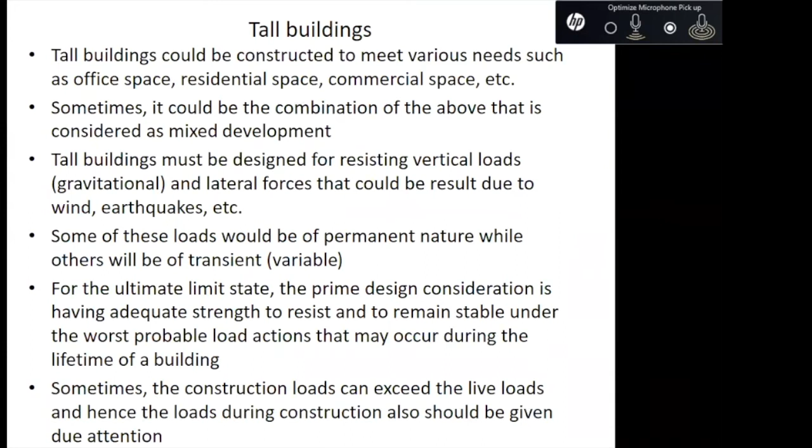So last time I gave an introduction. I told you the various general stuff, like the type of concretes that we'll have to use. And then we also talked about the deflection and drift index, wind-induced movements. We'll be covering these in great detail later.

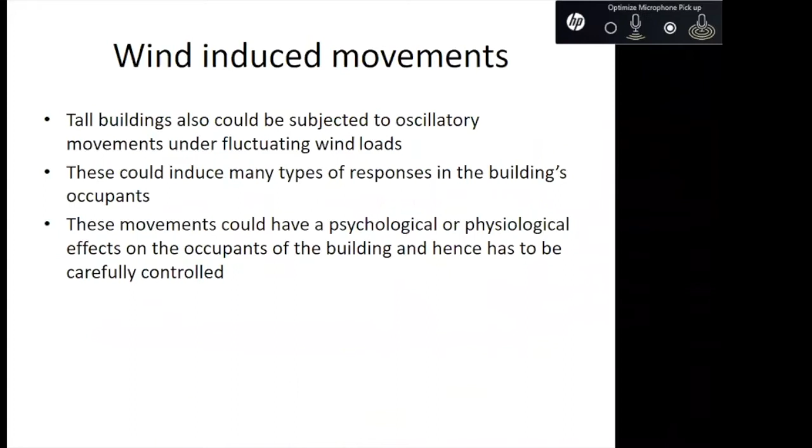But what I wanted to emphasize was, in a tall building, the lateral load resistance system can be very important. In addition to that, we need to have an efficient vertical load resistance system. So once you have both systems, we need a good foundation, a foundation that will not move, because we don't like buildings moving at the foundation level. We like buildings to be stationary.

So basically, we are talking about vertical cantilevers. Generally, when we are talking about cantilevers, we always think about horizontal cantilevers. Something projecting out without a support is a cantilever. So all the tall buildings are vertical cantilevers, where if it is a cantilever, then we must fix it at the foundation level.

So we have to see how we fix it at the foundation level. For that, I have separate presentations on how to deal with raft foundations, how to deal with pile foundations, and even in the raft foundations, whether you want to have a solid raft or a cellular raft or inverted T-type raft.

Where we'll use the inverted T's plus the confined soil, the soil confined by the ground slab to act like a raft. And then we can also have raft foundations on sandy soil or laterite soil. In laterite soil, we might find sometimes the water table is high, sometimes the water table is low. So I'll show you that the modeling techniques can be very different when the water table is high and the water table is low. The reason is, if the water table is low, we have laterite soil, we consider soil behaves like sand. On the other hand, if the laterite soil has a high water table, we consider the soil behaves as a clay soil. So clay soils are very different to sandy soils.

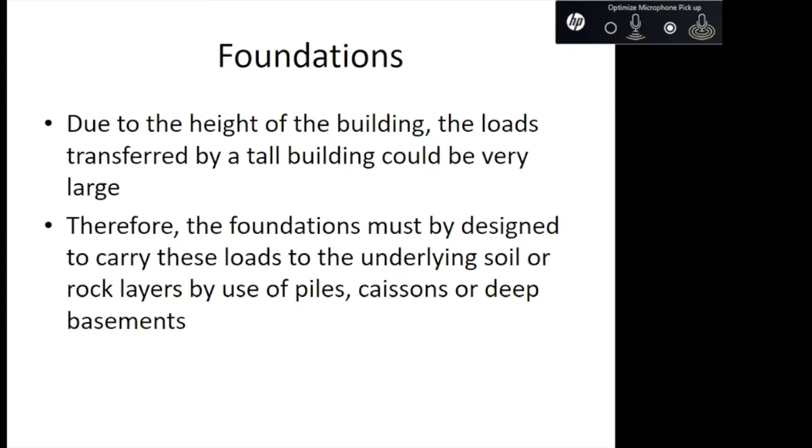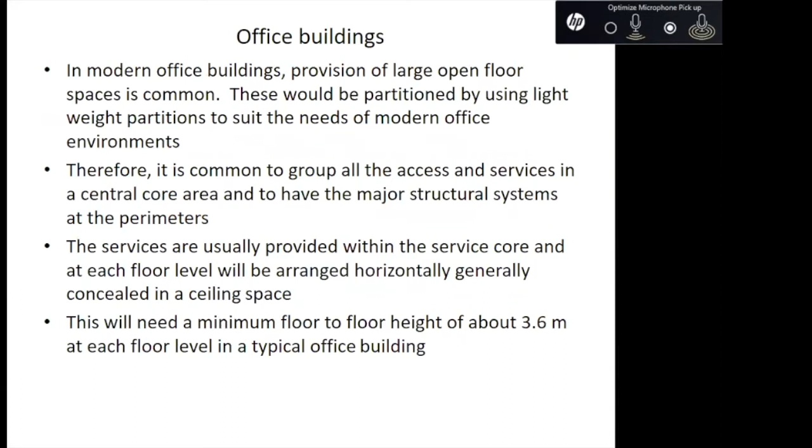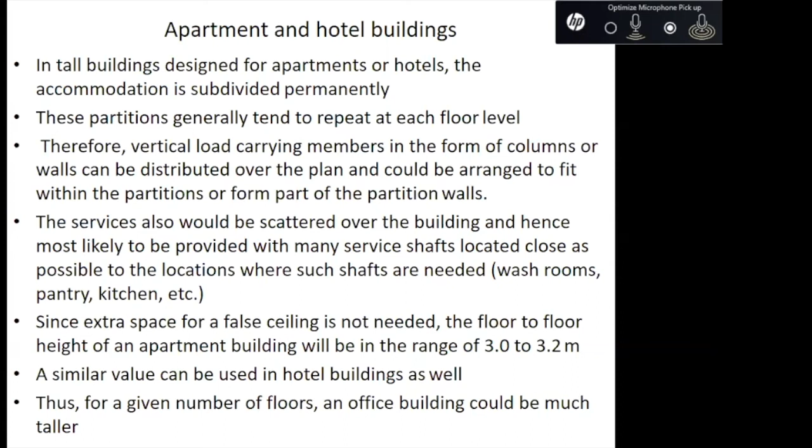So that's why we are going to look at structural forms today separately. Before doing any calculation, we are going to understand how a structure can behave. For that, I told you we can have apartment buildings, hotel buildings, office buildings, so many different types of buildings. So we have to see what are the different structural forms that can be used. You can see there's a long list of structural forms, and you should have a thorough understanding of the behavior of each and every one, so that you will be able to give reasons.

Because of that reason, sometimes we might be able to cover all these things today, or if we can't cover them, we'll go to another day and cover it, because a deep understanding of the behavior of each and every structural form is very important for you to come up with a good solution for the lateral load carrying system of a tall building.

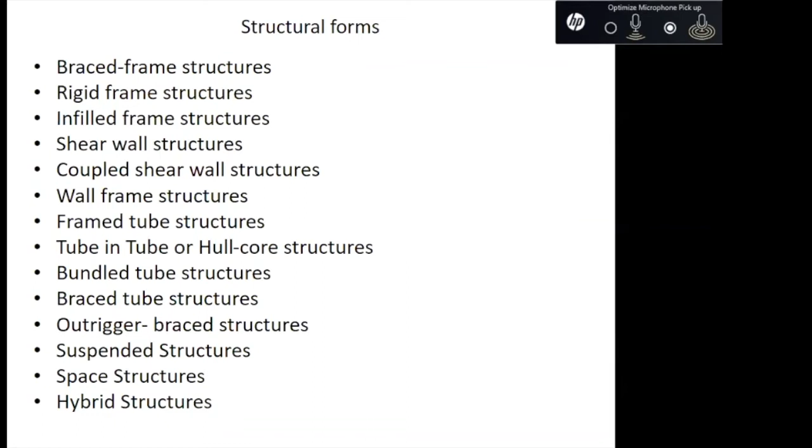So first we'll start with the simplest possible structural form. The reason is, this is particularly suitable for steel structures. Then you'll ask why steel structures, because last time I told you steel is a good material, but it's not the best material. Why? Steel's elastic modulus does not change when you change the strength of steel, whereas the elastic modulus of concrete increases as the concrete strength increases.

But when people started constructing in early days, they did not have concrete, or rather, they had concrete, but very weak concrete, like 20 megapascal, maximum 25 megapascal concrete in 28 days, nothing more than that. But what you have to keep in mind is, those days, the cement composition was very different. It was tricalcium silicate, which gives strength up to the 14th day, about only 50%, and 25% was dicalcium silicate, which can give strength from 14 days onwards. So dicalcium silicate was 25%, meaning if you cast concrete in favorable conditions with high humidity, it will continue to gain strength.

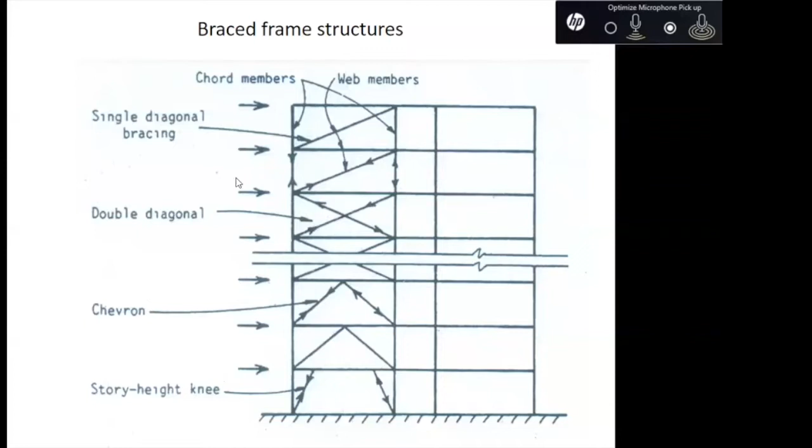Now, right, so lateral resistance is provided by diagonal members that act together with main members. Diagonal members form web members of the vertical truss. Columns act as chords, so basically it's a vertical truss. One of the main disadvantages of bracing is those can be in conflict with the location of doors and windows, so you cannot freely provide doors and windows because there are diagonals everywhere.

So the bracings are usually arranged around the lift shafts and stairways. But the problem of arranging the bracings around the lift shafts and stairways is that the size of the trusses can be small. If it is a tall building, you might find the lateral stability is provided by the bracings, but the deflections are too much, the movements are too much, the accelerations are too much. So you can have enormous problems, systems can be weak.

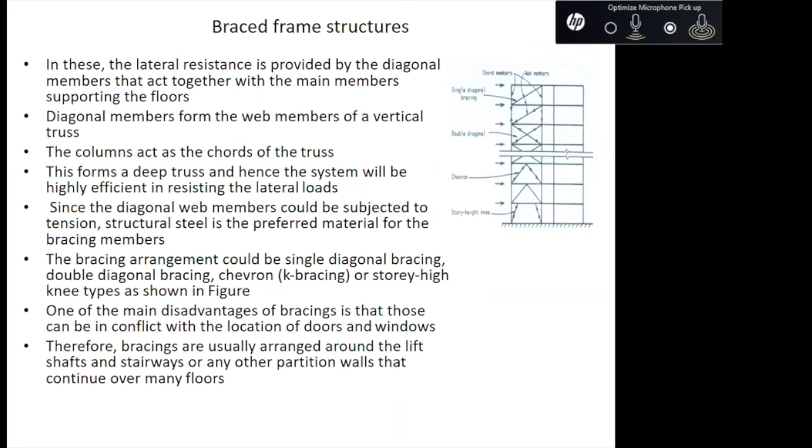Because of that reason, people have developed heavy mega trusses. The truss outside the building, you make it a feature of the building. And because it's a feature of the building, what happens?

You can see the truss from outside, so you can see it's a steel building. The architect has to come up with some kind of window system where he will hide the truss as much as possible, or he will come up with a feature where he will show the truss readily so that it can be seen, but he makes it an architectural feature. There are so many steel buildings in the world, and most of the tall steel buildings are in America, because they were very fond of using tall steel buildings.

But even in America, the trend is changing, because now they are finding concrete, which is based on natural materials, can be made super strong, and the codes also allow us to use super strong materials. So concrete is very fast gaining popularity.

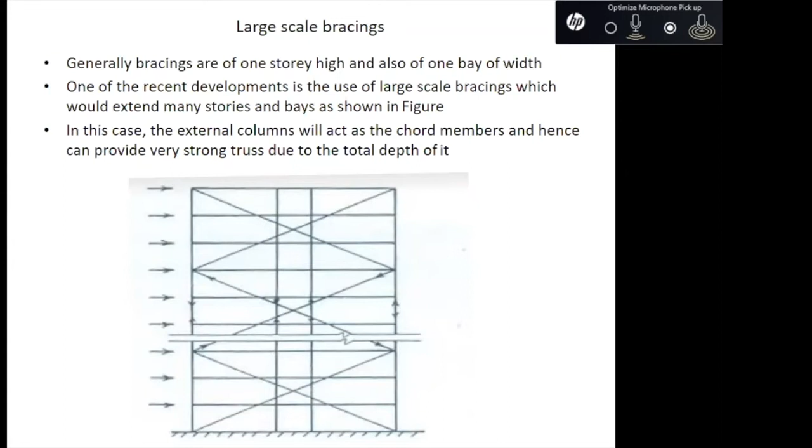Now let's see the behavior of a truss. The truss can behave in two modes: one is the cantilever mode, the other is the shear mode. This is shear mode, this is cantilever. The difference is, in cantilever mode, curvature is zero at the bottom and maximum at the top. In shear mode, curvature is maximum at the bottom and zero at the top.

So what is the combined behavior? At the bottom, cantilever mode dominates; at the top, shear mode dominates. So it goes in one direction, then it comes back. That is the behavior you can expect in a truss.

Generally in a horizontal truss, we expect one behavior, maximum deflection at the end. Here also you get maximum deflection, but in a normal horizontal truss you will primarily get cantilever behavior. In buildings, because there are other frames, the combined behavior can be dominated by cantilever behavior at the bottom, and again dominated by shear behavior at the top. This happens because there are so many other frames in the structure, and those frames also contribute to a certain extent, and because of that you can get both cantilever mode and shear mode.

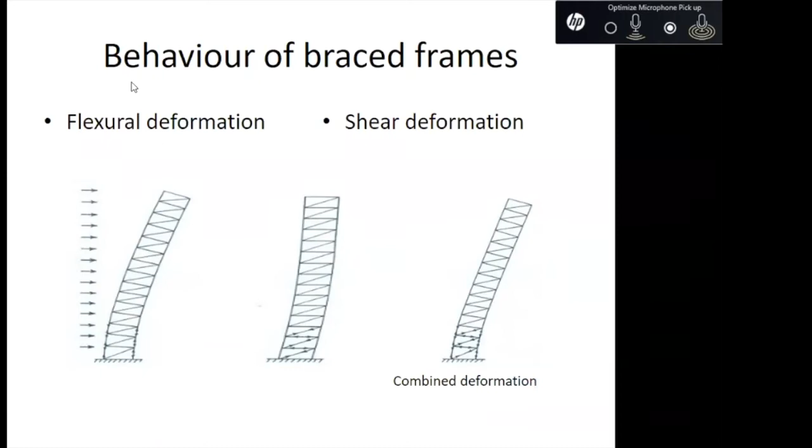Is that clear, Manjula? I think, yeah. They are muted here. Okay. Yes.

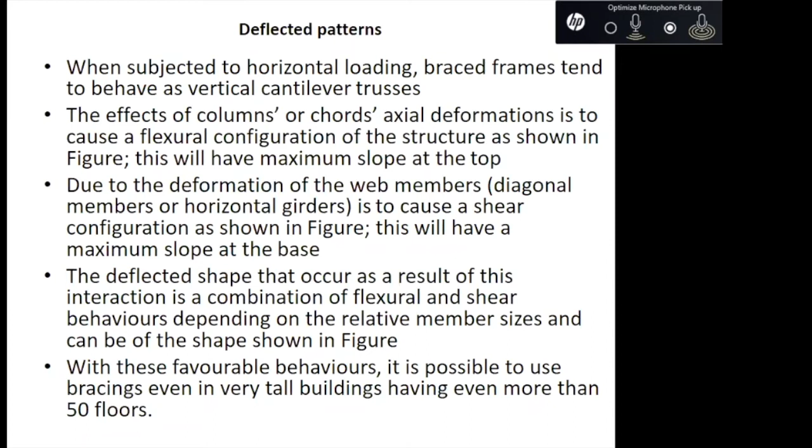Now we are talking about concrete structures, because making a rigid joint in a steel structure is very difficult. But making a rigid joint in a concrete structure is very easy because we are going to cast it at the site. Cast it at the site, easy to cast. So when you in-situ cast beams and columns with continuation of reinforcement, what happens? What is the type of joint you get? You get a rigid joint, a properly connected joint.

Before the rotation of the joint, the angle between two members is 90 degrees. After rotation of the members, still you find the angle between the two members is 90 degrees, and that type of joint is called a rigid joint. So what deforms is the beam and the column, but not the joint. The joint remains at 90 degrees before and after deformation. Can you see the definition? Before and after deformation, the joint angle is 90 degrees, but you can have deformations in columns and beams.

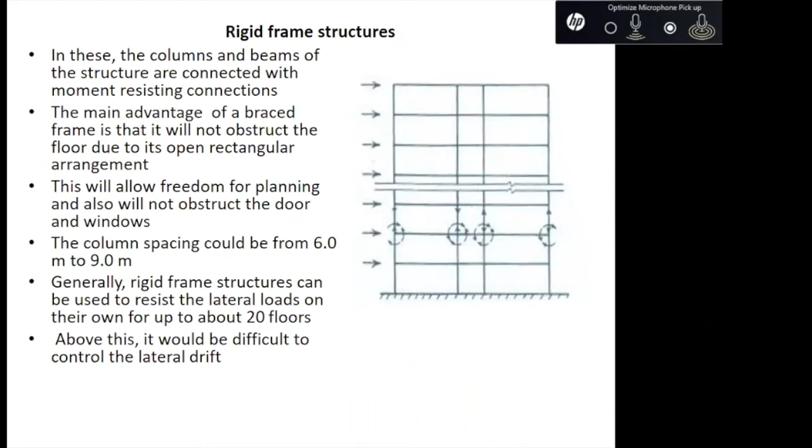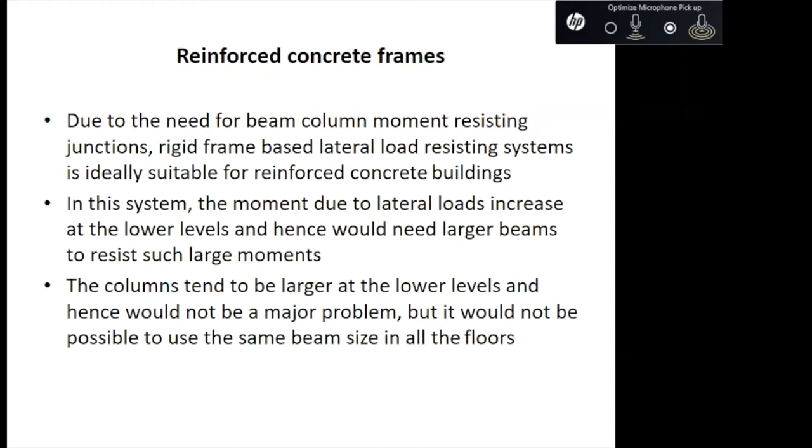Due to the need of beam-column junctions, this is particularly suitable for reinforced concrete buildings. As you come down, the whole moment due to lateral loads acting on the lower floor columns and beams means you might need to have large columns, and you might need to have large beams as well.

Now, just one moment.

Then we can also have another system which was very popular in the Eastern Bloc countries, and that is use of infill walls to resist lateral loads. And you might ask, how do you design this type of system?

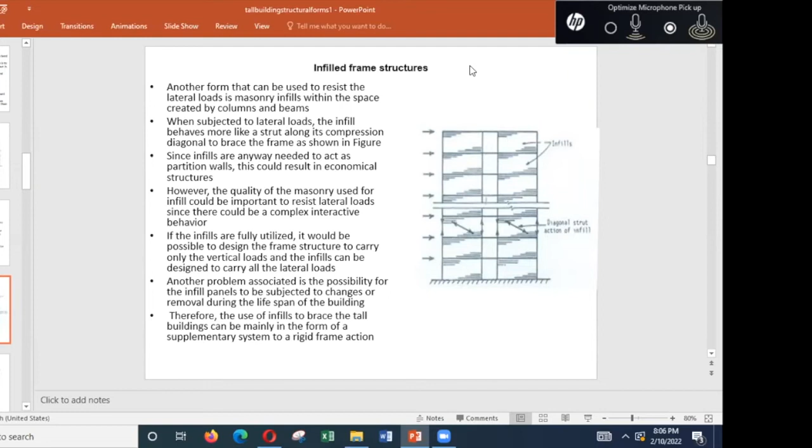The design methods are given in the book by Smith and Coull, a very good book for tall building design. Try and find a copy of that. It's a very complicated book with loads of mathematics, but you don't have to go through all the mathematics, just try and read it, because I also have used a lot of material from that book. It's one of the finest books ever written, but both authors are dead now, no longer living, but it's a fantastic book.

But you have to keep in mind, when reading, it covers the way the theory evolved before computers existed. Because of that, there are a lot of theories in that book covering the fundamentals of tall building behavior. But these days we are going far beyond what's in the book, because today we have computers and software, and we can model the same structure with finite element method and see the behavior ourselves. We don't need theory to determine the behavior.

We can make a model and see it ourselves. But to know whether the results given by the computer are correct or wrong, you need some knowledge and you need to know what the theory says. So to get that knowledge, just glance through the theory, see what they have done, see the summaries, and see whether you can get a reasonable idea about the behavior. But don't try to understand all the mathematics in that book, because it was written before computers became so widely available.

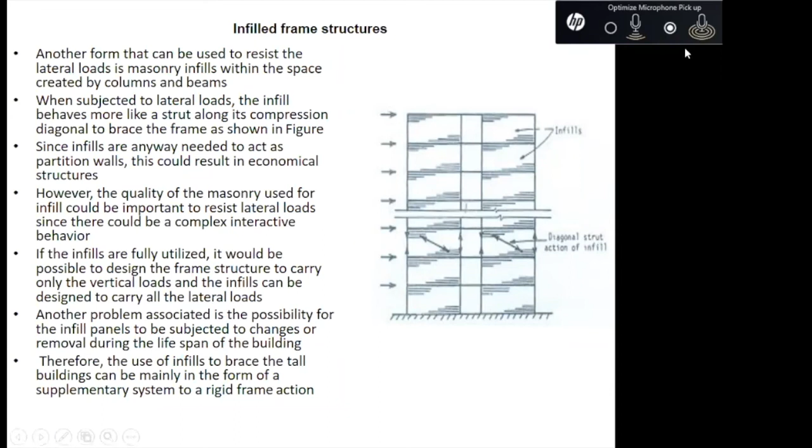If you type on the internet, Armenian earthquake, it says 2 earthquakes hit Armenia on 7 December 1988, killing 60,000 people and destroying nearly 500,000 buildings. 2 tremors only minutes apart were measured 6.9 and 5.8 in magnitude and were felt as far away as Georgia, Turkey, and Iran. So what happened was, it simply flattened the 2 major cities in Armenia. And then you'll ask, where's Armenia? Armenia is at a lower latitude, and they were all Russian bloc countries.

Some countries, after the Second World War, and after 1990 they all got freedom, and today they are separate countries. And you would have also seen that Armenians and Azerbaijan people have been fighting each other.

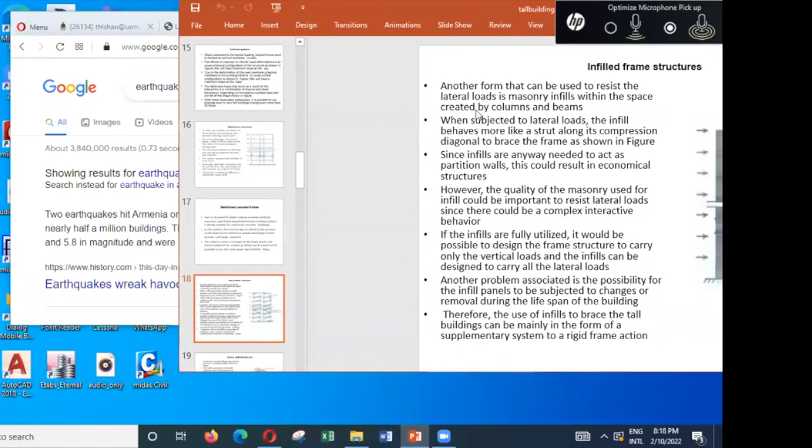So basically, what you have to see is, if you have bad construction, poor structural forms, a structure collapses in an earthquake, the damage is 60,000 people killed and 500,000 houses destroyed. So these are true events, and from these true events you can see there's a lot of damage you can expect when you do not have proper systems. The problem with masonry is sometimes you tend not to tie masonry properly, and when you don't tie masonry properly, you can run into enormous problems.

So basically, when subjected to lateral loads, the infill behaves like a strut. Mainly the infill panel goes into compression and acts like a compression member, and then there can be some cracks occurring due to the deformation of the panel. These cracks occur due to shear failure or tensile failure. All those failures are covered in sufficient detail in that paper.

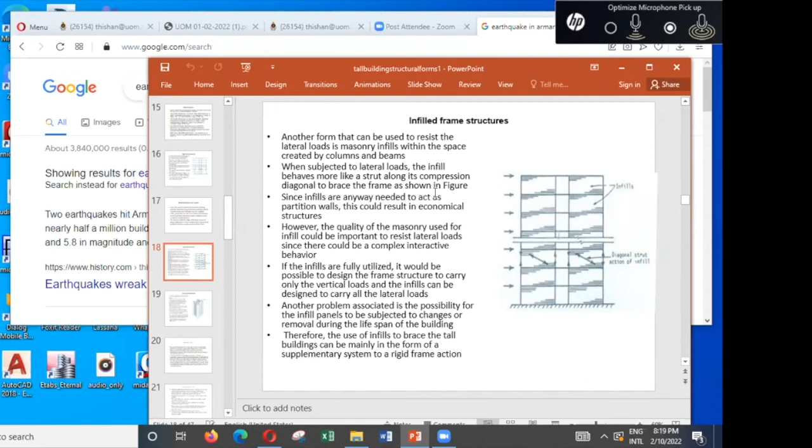If you want more information, always refer to the book by Alex Cole and Smith and Coull. I think it's Alex Smith and Smith and Coull - just one moment, the name of the book is Tall Buildings by Smith and Coull. Yes, it's called Brian Smith, Bryan Stafford Smith and Alex Coull - Alex Coull and Bryan Stafford Smith. So that is the book, a very good book, and copies are available in the libraries, and you might find sometimes even some soft copies somewhere.

Then the main challenge in infill panels is the quality of the masonry used. Quality of the masonry used.

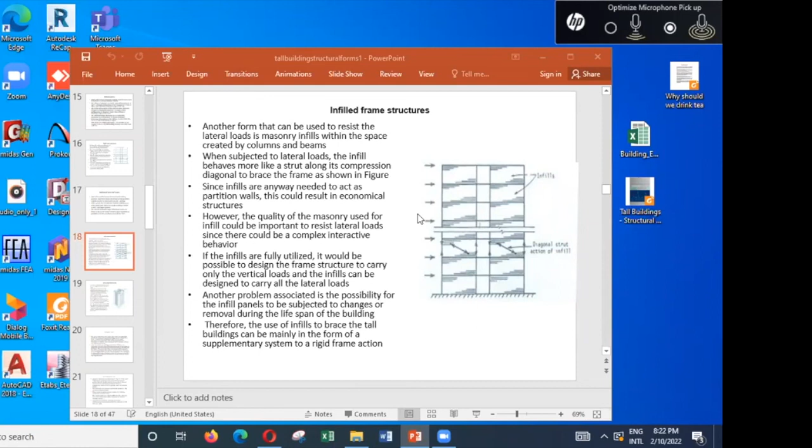So shear wall structures - shear walls are concrete walls, not like infill walls. You cannot remove the concrete walls easily because it's hard to remove them. Because of that reason, we use shear walls a lot in our buildings, and shear walls can be made out of concrete. Higher the strength of concrete, higher the elastic modulus, lower the deflection.

That is the main advantage of using shear walls, because sometimes if you find it's difficult to control the accelerations, wind-induced accelerations and so on, you might use higher strength concrete for the shear wall system. But that will all depend on the height of the building and so on.

So this is a typical example, and sometimes these days we don't use these kind of extra columns at the corners, but nothing says that you cannot use it - you can use it, but you have to make sure that correct strength materials have been used so that you can get the appropriate elastic modulus, and that will help you make an assessment of the wind-induced acceleration and the drift.

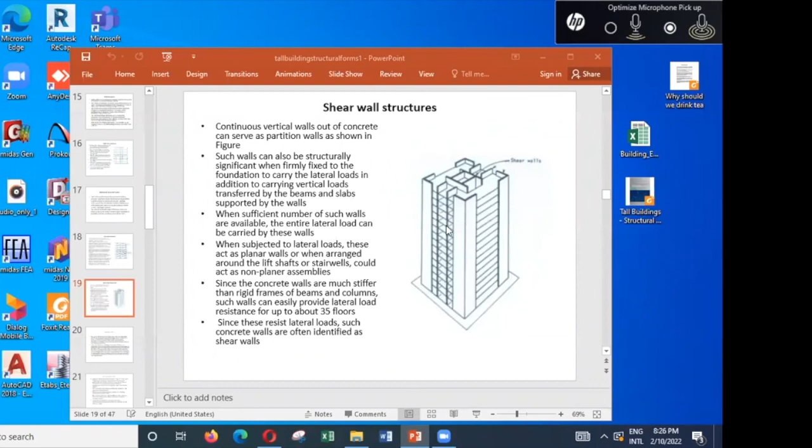So now the time is about 8:25. These shear wall structures involve a lot of work - proportionate systems, non-twisting systems, twisting systems, non-proportionate systems - so many different systems to be learned. We have only a few minutes more. If you want, I can take 1 or 2 questions and wind up the lecture, but we can continue this lecture because this is a very important part. Unless you understand this, there's no point in understanding how to do computer programs, because computer programs can actually destroy your career by giving you wrong answers if you did not understand the behavior. You just plug in some numbers and get some numbers out, and they are totally wrong, and you can end up in serious trouble when you don't understand how structures behave. So we can spend a few days, learn it properly, and move forward.

So, Engineer Kamala, how many questions do we have? Chat box, I see one. Yeah, chat box only one.

So that is about ties. In BS 8110 you have ties, and the same rules are available in Eurocode as well. So simply check - if you use them, the rules are very similar to British codes. The tie requirements are there in Eurocode, and if you want to understand it, I think it's covered well in McGinley's book. I can't remember whether it's covered fully in the book by Mosley and Bungey, but in McGinley's book I think it's covered. So basically, if you are familiar with BS 8110 and designing ties, you don't have to do many calculations - it's very similar equations, you can adopt the tie.